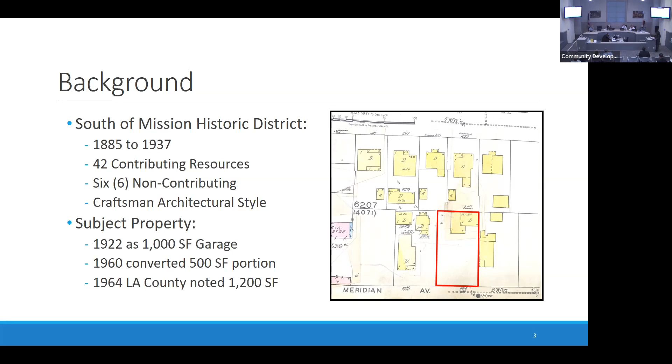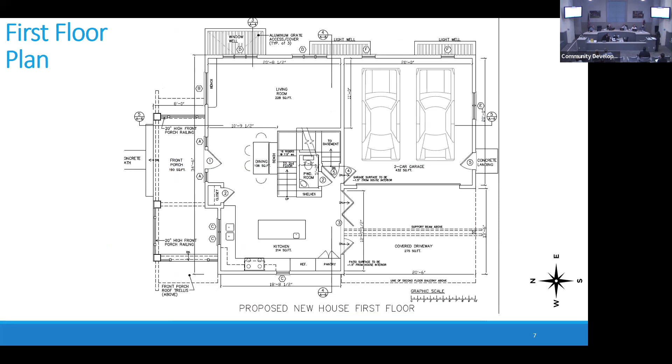In the second floor plan are 4 bedrooms and 4 bathrooms. And I'm sorry, in the first floor plan there's also a half bathroom.

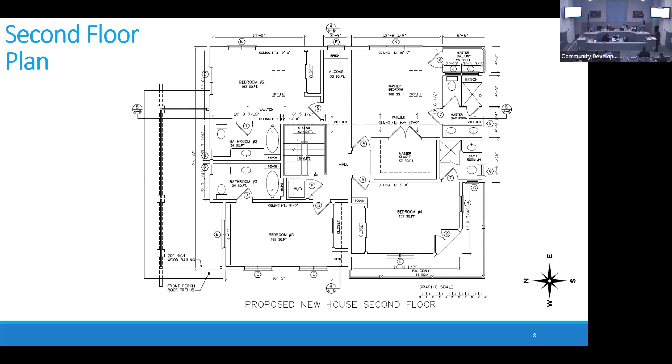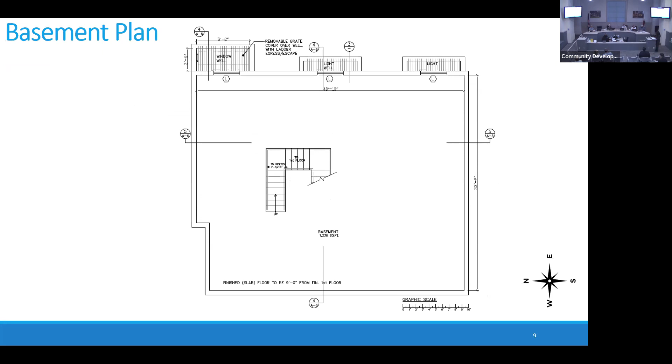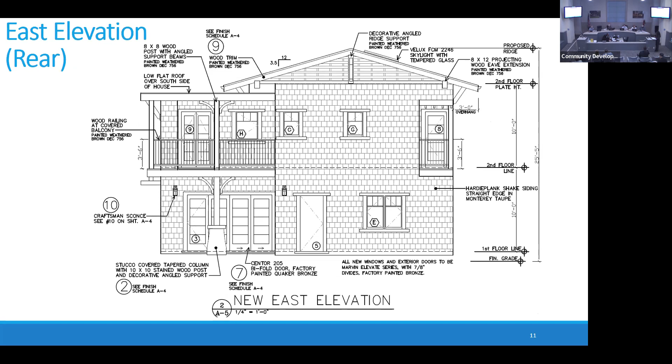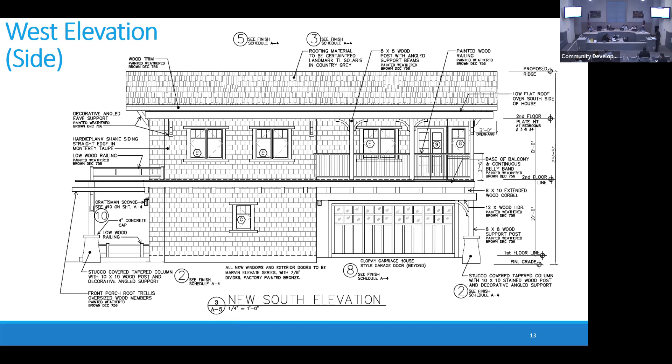This next slide is the east elevation, or the rear elevation. The next slide is the north elevation, or the side elevation. And the next slide is the west elevation, also the side elevation, where the garage will be accessed. This next slide is of the roof plan.

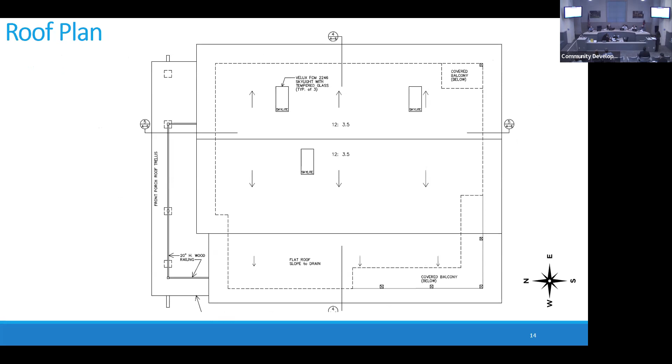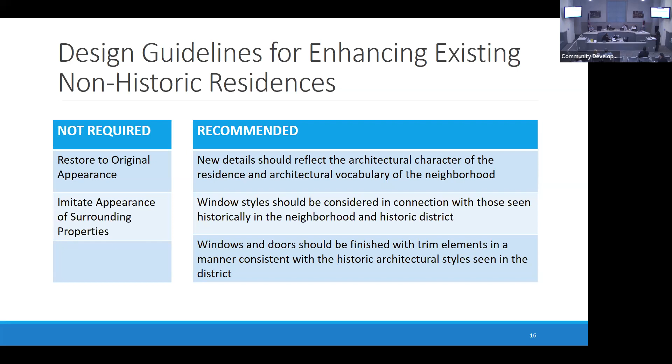What is recommended per the guidelines is that new details should reflect the architectural character of the residence and the architectural vocabulary of the neighborhood. Window styles should be considered in connection with those seen historically in the neighborhood and the historic district. Windows and doors should be finished with trim elements in a manner consistent with the historic architectural styles seen in the district.

As such, being that the applicant is proposing a craftsman-style home within a historic district that has an emphasis on craftsman bungalow style, staff recommends that the Cultural Heritage Commission approve the project subject to the conditions of approval.

If the Cultural Heritage Commission does not agree with staff recommendation, the following options are available. Number one, the commission may approve the project with modified and/or added conditions. Number two, the commission may continue the project to address comments discussed. Or number three, the commission may deny the project.

That concludes staff presentation. Staff is available to answer any questions. The applicant does not have a presentation, but is also here to answer your questions.

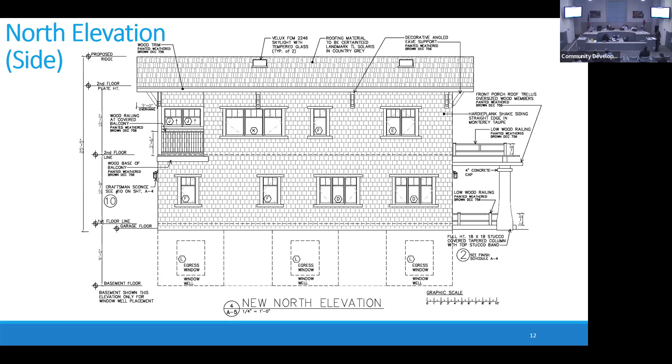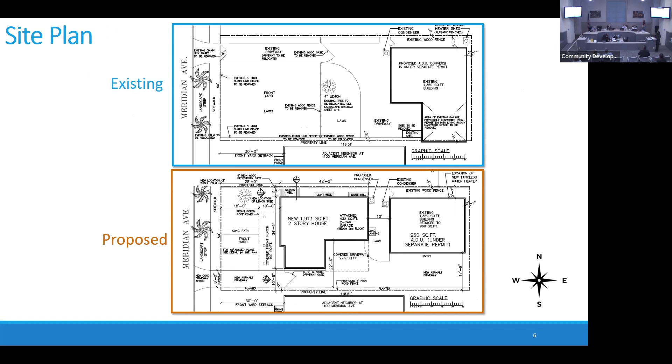Okay, I was trying to figure out on the drawings, I can see on the site plan a little bit of the south building. I was trying to find the front of the porch of the new structure, and how it compares to the front of the porch of the other. Are they closer to the sidewalk or not? I'm not sure, I can see a little bit, it seems closer to the sidewalk. Yes, it's the dashed line there, right in front, there's the three pillars. I see it here, but how does it relate to the other properties, the adjacent properties? There was a slide that showed the map, but yeah.

But this is probably not necessarily to scale. So anyway, I would have asked the designer, but he's not gonna present today. He's here to answer questions. Okay, maybe he can answer it a little bit. That's it, that's all I have.

Thank you. Commissioner Cross, questions? My question would be directed to the architect.

I like the project with the exception of all of the skylights that break up the roof. I think the skylight over the stairway is a wonderful idea, but do bedrooms really need a skylight, especially when it breaks up and possibly eliminates the possibility of putting solar panels in that area, since the sizes of solar panels are fixed? Are they really necessary in the bedrooms, or to provide light to the bedrooms?

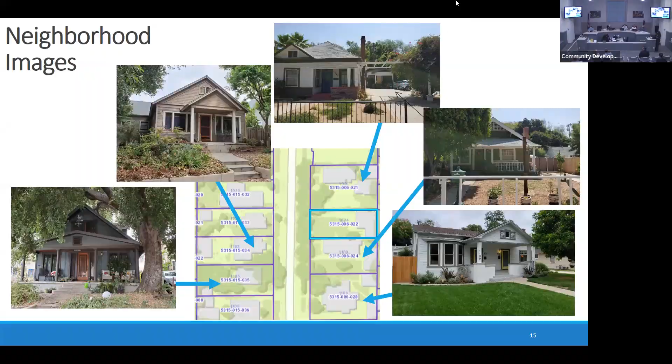Welcome, Mr. Dahl. Thank you, commissioners, honored, esteemed commissioners, good thoughts and comments. I never have a presentation - I'll have to talk to staff about that. I don't prepare a PowerPoint or anything. I get to them ahead of time because I like to listen and respond to your concerns and thoughts.

And this has been a great project, so thank you so much to all the staff. Starting in May of last year, this project was submitted in August last year, so a little bit over a year to get to you guys to a public hearing. So tough, and we're looking forward with all of staff's help to get through the 80 to 100 projects in backlog still.

On the palm tree, I think she answered that. The neat thing, that's probably the easiest of all trees to relocate. If you've ever been to Las Vegas, they're moving those all over the place all the time. A palm tree is basically in the grass family and has a very small root ball structure, so we're hoping to move that. We'll be working with Public Works and an arborist of our own.

There is, interestingly and shockingly to me, I found out recently in LA, because I love those tall palm trees - they've been around since the 20s, but they have a lifespan, and some of these trees are getting close to the end of their lifespan. So if that's the case with this particular one, there's two trees in front: one will stay, one will be relocated. If it's already close to its lifespan, it's stupid to move it, and we'll replant something as big as possible.

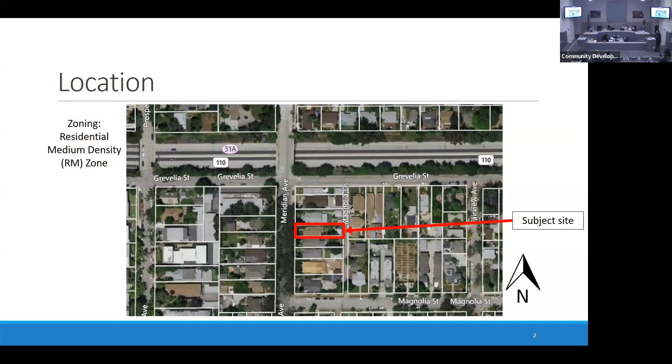The property was originally developed in 1915 with a single-family residence. The subject site is currently legal nonconforming due to its size and is currently developed with a 1,314 square foot single-family dwelling with a detached 430 square foot two-car garage. After its original build, the existing residence went through a few modifications, such as a bedroom and bathroom addition, a garage expansion, a patio cover, window changeouts, and other minor electrical and roofing permits.

The city's inventory identifies the property as a 2D California Historical Resource Status Code. The property is part of the North of Mission Historic District, defined as the 600 to 700 block of Meridian Avenue, north of Mission Street and south of the Pasadena Freeway. The district is comprised of approximately 22 contributing properties built between 1895 and 1924, categorized as one-story, single-family residences designed in the early craftsman bungalow style.

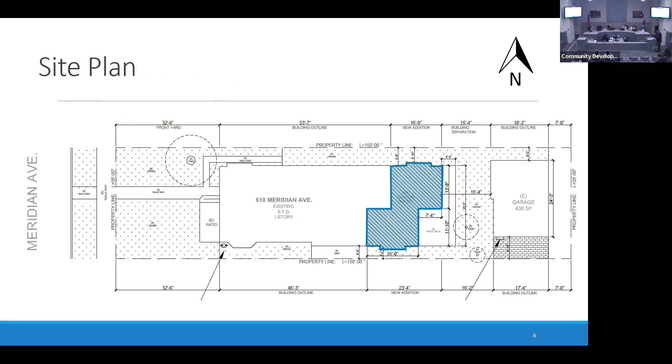Here's the existing floor plan of the current home, and here's the floor plan with the new proposed addition. In red, you'll be able to identify the new bedroom addition, while in blue is the dining room.

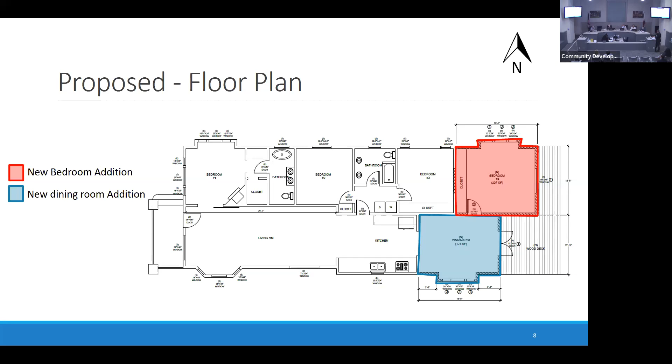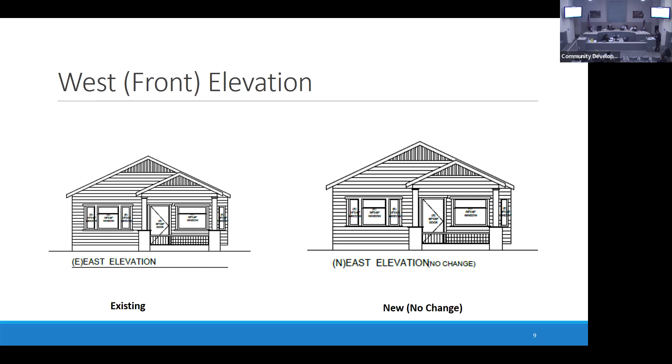As proposed, the front facade will remain the same. No modifications to the front are being proposed as part of this design review permit. The existing east elevation will be completely replaced by the new addition. The new addition will simulate the style of the existing home to best respect the historic character of the district and property.

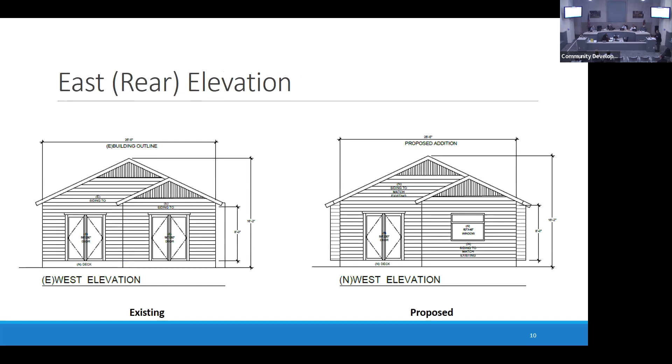Here we have the east elevation of the existing and proposed structure. Similar to the west and east elevation, the south and north elevation were called out incorrectly. They are actually reversed in the development plans. The rear addition will simulate the existing craftsman style to respect the integrity of the home.

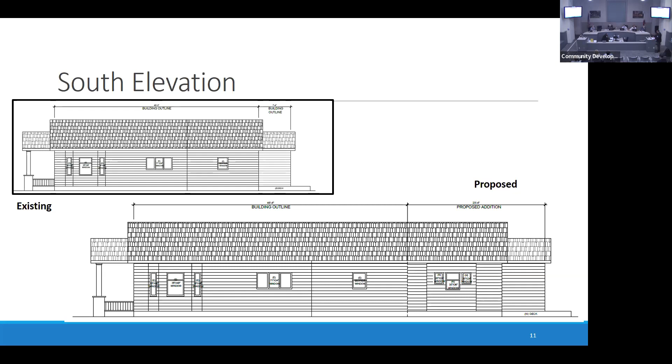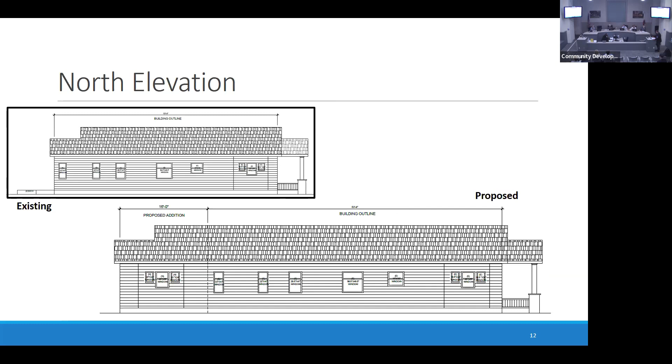And here we have the existing and proposed north elevations. Staff would like to make a quick correction to the plan. Sheet N2 of the development plans depicts the addition without the south-facing bay windows. This is the parking plan, which incorrectly calls out the addition. The correct site plan can be referenced in the first page of the development plans.

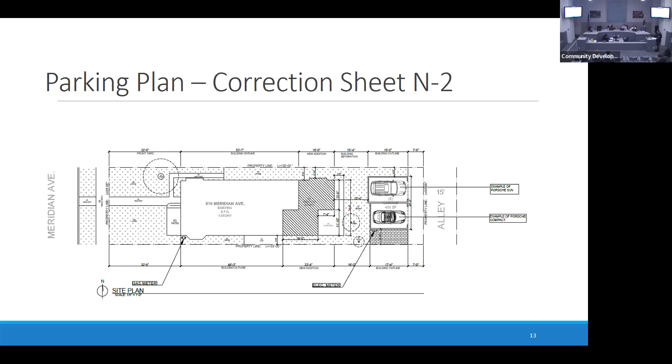Therefore, staff would like to recommend the Cultural Heritage Commission approve the project subject to the conditions of approval.

Here in chambers, we have the designer and the property owner to answer any questions you may have. Thank you, Braulio. Does anyone on the commission have questions of staff on this project?

Vice Chair Lopez says no. Commissioner Thompson says no. Commissioner Morris says no.

And Commissioner Cross. So, did I hear you say that on the south side, the bay window is going away? That's at 3 feet 2 inches and it's being pushed back to the full side yard?

The correct site plan will show the bay windows at the south. So the incorrect one, unfortunately, did not identify those bay windows. What is the code requirement setback, side yard setback for that dwelling? In this case, the property has legal non-conforming setbacks, which are allowed to be followed per the non-conforming development standards. It will follow the same setback as the existing bay windows at the front of the home.

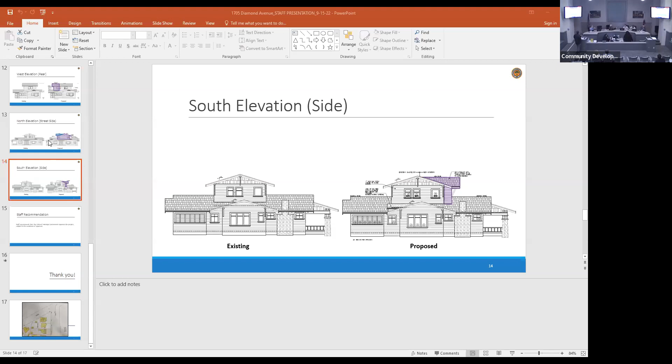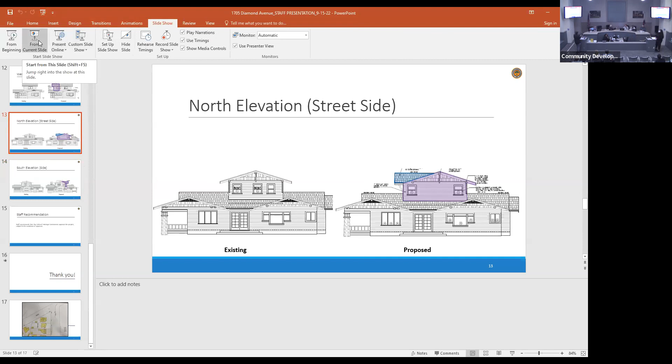So you see the post, the window, the way the roof hits the side. Is that drawn correctly? Because if you look at the roof plan, it shows the same overhang going all the way around, but even here it's not. Is this a correct representation, or is it the roof plan that's correct? The roof plan probably shows the same overhang going all the way around.

Yeah, there's the same overhang all the way around. I see what you're saying, on the right in the nice colors. We don't have the overhang shown on the left, correct, and it shows on the right. I'm so sorry about that. Good eye, we got to get that in there. So I assume the roof plan you have goes the same way all the way around. It's got to go all the way around. So yeah, not like that. Okay, good, I like the lavender, but yeah, not like that. Good, sorry, okay, that's it.

There is one teeny little adjustment on the south elevation. The whole stair was bootlegged in and doesn't meet any code. That's another clue that the whole second floor was an addition. So we're doing a very slight modification of the roof on the south side, hidden behind the front - you won't see it, kind of a little shed dormer to get some head height. I'll hit my head going up the existing stair done in 1973, 74. So I did want to point out that other minor little modification.

Commissioner Thompson, any questions for Mr. Dahl? Steve, there was a pop-up there in 1956 on the Sanborn map. First time I saw the Sanborn map is today. Yeah, it shocked me, I had no idea - way before the 70s. So that kind of shoots that story down.

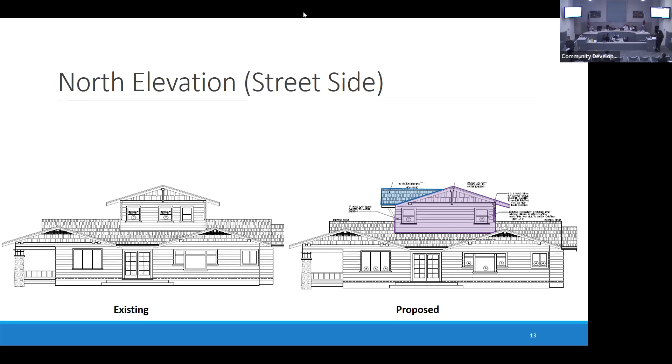All right, thank you, Mr. Dahl. At this point, we will open the public hearing. Staff, were there any public comments received for this item? There are no public comments in chambers. And if our guests on Zoom have any public comments for this item, please raise your hand. There are no hands raised. We have no public comments on Zoom.

Okay, this is the point in the proceedings when the applicant has the ability to give a 3-minute rebuttal. Mr. Dahl, do you want to avail yourself of that or take a pass? All right, the applicant is indicating that he has no rebuttal. So we will close the public hearing and begin commission discussion.

Commissioner Morris: Can I ask you more experienced commissioners, what is the answer to the question of does he differentiate this addition from the previous addition or the original? Well, the second floor, it's whatever it was. I mean, yeah, that's a great question and we didn't really address it yet. I guess there's different ways to look at it.

Personally, my first instinct would be to actually change the siding on the whole volume. I would actually do shingles instead of siding, because shingles is a very typical craftsman thing. But again, I'm just saying I would match the whole, because half of it... but that's me.

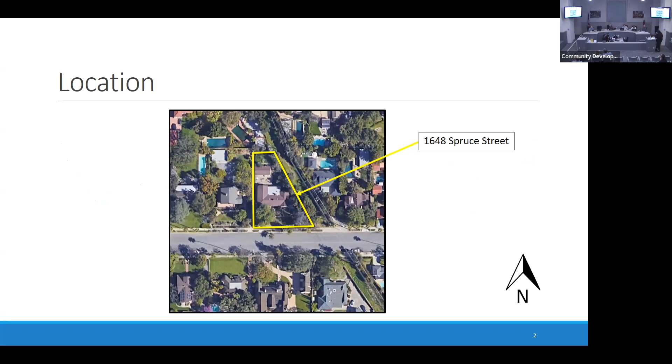Okay, Susanna, you're up again. Thank you, Chair. So the last project on our agenda is project number 2489, which is a notice of intent to demolish for the property located at 1648 Spruce Street. The subject site is located on the northerly side of Spruce between Fair Oaks Avenue and Magnolia Avenue, and it's an irregular shaped lot bounded by residential properties to the north, south, east, and west.

The slide before you identifies the image of the subject site, which was developed in 1937 with a single family dwelling and a detached garage. The site is not included in the city's inventory of historic resources, and it is a non-contributor to the eligible Juanita Park District, which is comprised of modestly sized period revival single-family residences with a high degree of integrity.

So the applicant is requesting that the Cultural Heritage Commission review and validate the findings within the Historic Resource Evaluation Report, which determined that the property is ineligible as a historic resource at either the national, state, or local level.

In accordance with the city's cultural resource ordinance, any structure that is over 45 years or older that proposes a demolition and is not identified as a cultural resource requires the preparation of an intensive level historic resource evaluation. The HRE was prepared by a city-selected architectural historian consultant, Thalia West, and the HRE determined that the property was...

not a significant example of an architectural style, that it was not designed by a master architect. It was evaluated as a non-contributor to the eligible historic district, and alterations to the structure have impacted the integrity of the design, material, and workmanship.

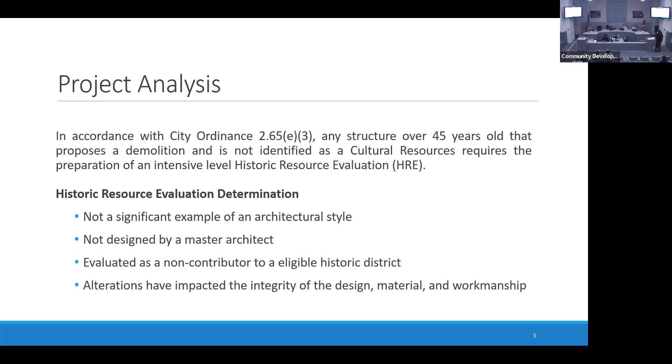Therefore, staff recommends that the Cultural Heritage Commission determine that the property does not meet the national, state, or local criteria for historic designation, and that the project may proceed through the city's application process without any further restrictions under the Cultural Heritage Ordinance. This concludes my presentation. Thank you.

Do any commissioners have questions of staff? Commissioner Cross, no questions. Commissioner Morris, Commissioner Thompson, and Vice Chair Lopez. No.

I only have a comment, and I don't know if we have present either here or virtually someone from the firm that prepared the HRE. We do not, we only have the architect for the project available via Zoom. Okay, I just wanted to point out a couple errors in their history of South Pasadena on page 8 of the HRE.

In the very second paragraph, it says that Father Junipero Serra established the Mission San Gabriel Archangel several miles west of South Pasadena in 1771. That's several miles east. That was my route to work for a long time.

And then down in the fourth paragraph, it states other railroads running through South Pasadena in the late 19th century included Southern Pacific, the Union Pacific, and the Pacific Electric Railway Company. These railroads encouraged development, and by the end of 1887, the town's business district had doubled in size. Well, nice, except the Pacific Electric Railway Company wasn't formed until 1901. So just two misstatements there regarding the local history. That's all I had.